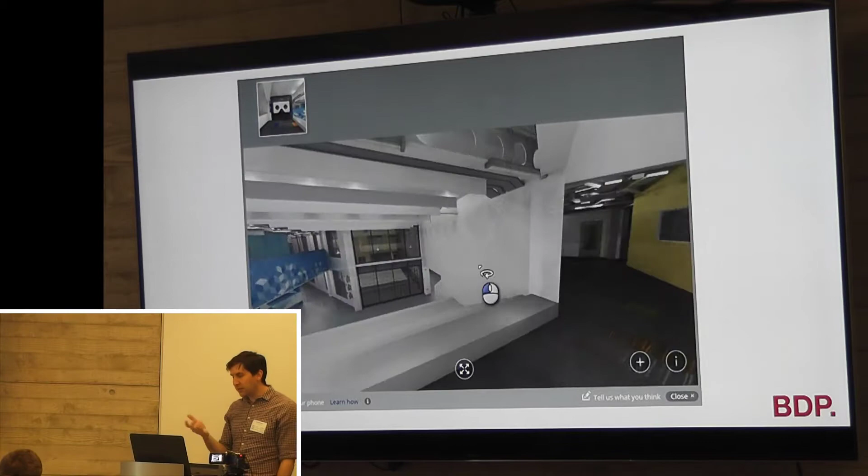So we'll start off with the cloud rendering. Possibly teaching grandma to suck eggs, but if you're in Revit and you want to create a stereo panorama - that's a 2-image panorama that allows you to have some sort of depth of field or depth perception - you just go to render in the cloud, pick stereo panorama, it sends it up to the cloud and renders it. So this is the sort of thing you get: an image you can pan around, and you need to get your materials right, you need to work on the model, otherwise you're just going to get something that doesn't look great.

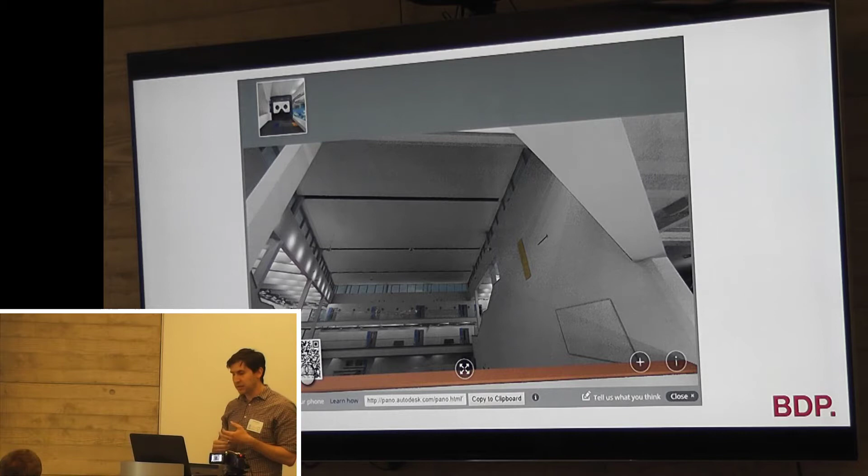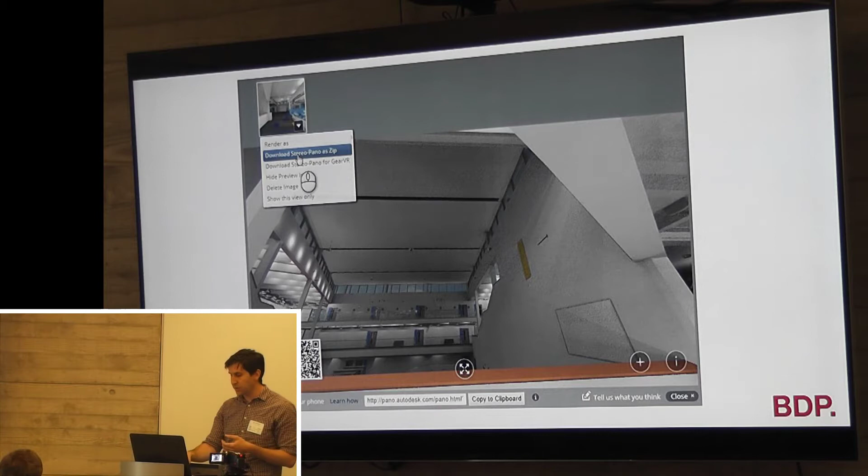But what we noticed with the cloud rendering is that it also showed this QR code, and we thought that's a cool tool. I'm sure everyone's used a QR code before and scanned it and it goes to that location. We thought that's brilliant, and you can also download this panorama essentially as a web page setup, so it's got all the files you need if you wanted to host it on your own web server.

I've been doing them for 10 years and I still don't know. But essentially it's kind of an unfolded elevations, 3Ds, and on our healthcare jobs it'll have a list of equipment that's in the room. This thing's evolved from being just 2D when we were working in microstation, to having these 3D images on the sheet. But actually what would be really cool is if we had a panorama you could scan and jump straight into, allowing users to look at this in more detail and really understand the space, because this quite often doesn't get across the sense of scale or the layout detail you want to portray.

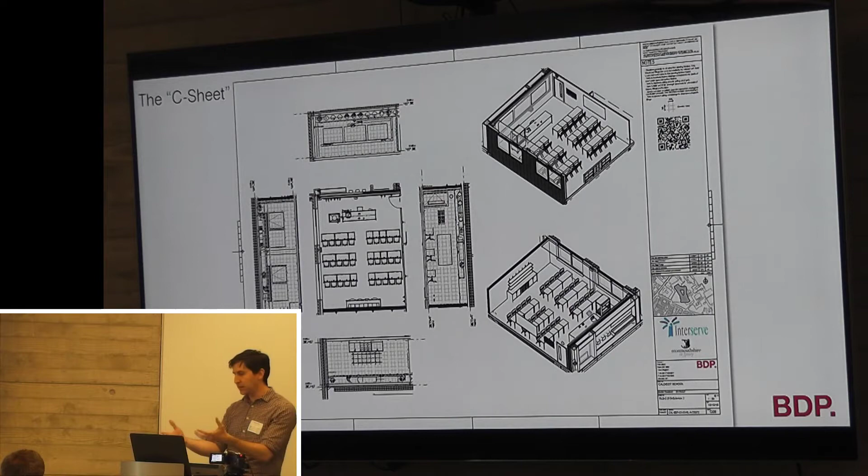So how are we going to do that? This is what we aim to do. Cheesy promo video. So the idea is that we issue, it could be hundreds of rooms, we issue the drawings before we have a meeting.

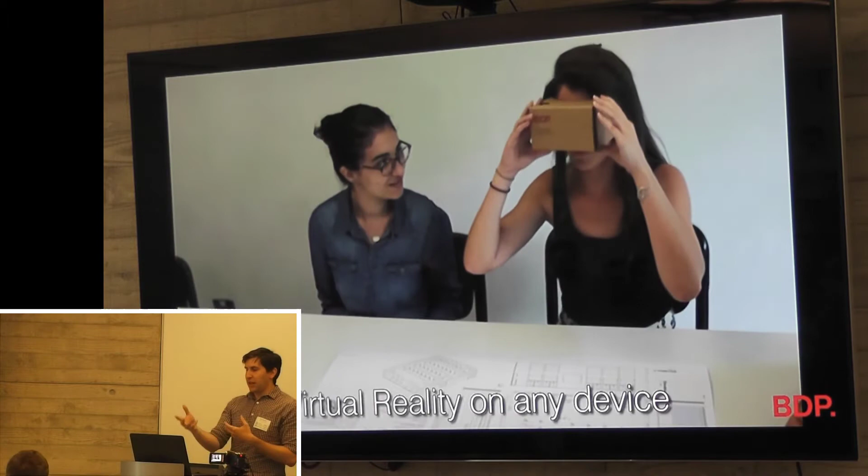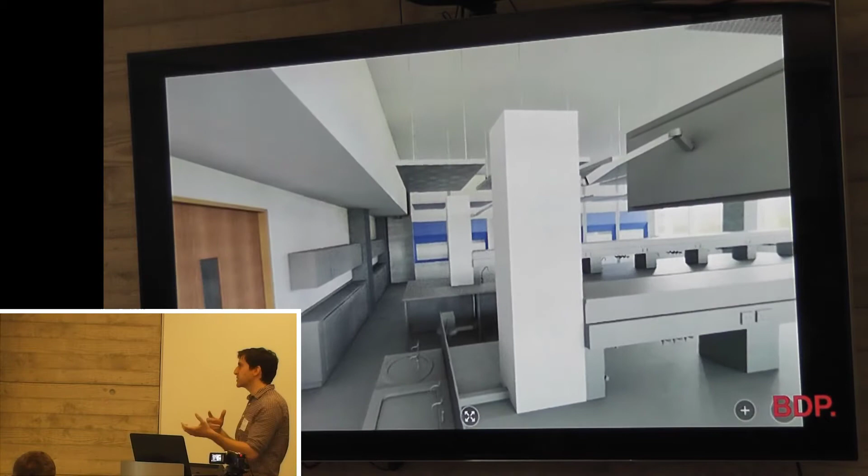We put the QR code on the C sheet, and hand out these free cardboard devices. They scan it with their phones, and it means our users have seen the space and the room well before we actually go to speak to them, so they've got ideas. Quite often before, it'd be the first time they've seen the space, and we'd end up having extra meetings because they hadn't thought of something crucial, so we'd come back and end up having many iterations of the same meeting.

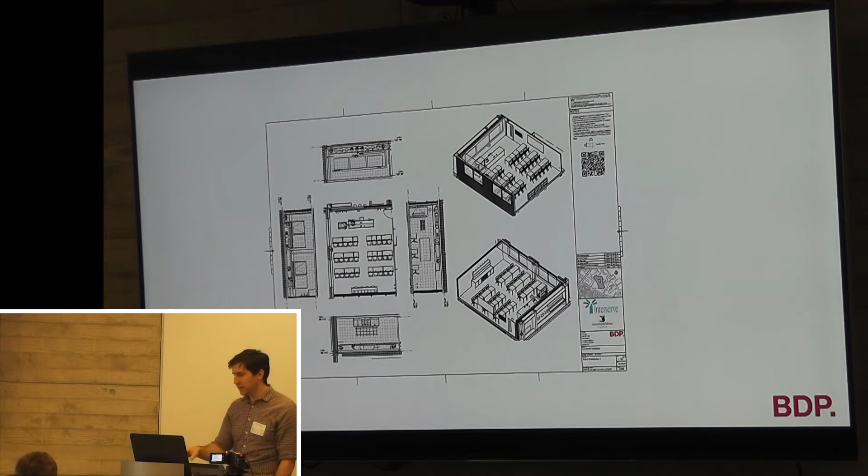So doing that once is fine. You could just go into the cloud renderer, snip that QR code, it'll be hosted on Autodesk cloud server. But there are two problems with that. One, imagine doing that for 400 rooms, it's not going to be particularly easy. Secondly, when you do a new render, that QR code is going to change and you'll have to update it, so that's no good. So how are we going to do it for loads and loads of them?

So the thing that answers all of my questions and my problems is Dynamo. We turned to Dynamo to automate as much of this as possible.

So there are a few steps to it. The first is that we automated the production of the view - we created a view at the centre of every room. The other thing this part of the script did is place a light object that was massively bright, so rooms that didn't yet have any artificial lights would still have a light source. It works because when you upload to the cloud render, it automatically adjusts the exposure, and we put the light at exactly the same point as the view point, so with Dynamo you don't get any funny shadows from that sort of thing.

So that's the first bit. The second bit, we use an external DLL that I was sent, which you can link to in Dynamo to create the QR codes for all the web pages we're going to upload this to. The advantage is we can have a static QR code, so if we update the image, we don't have to change what's on the sheet - someone just scans it again and gets the latest image.

Another script places the right QR code on the right sheet in the right place, because that's not going to be fun manually. It also takes that standard web page setup and distributes it into all these folders before being uploaded to our own web space.

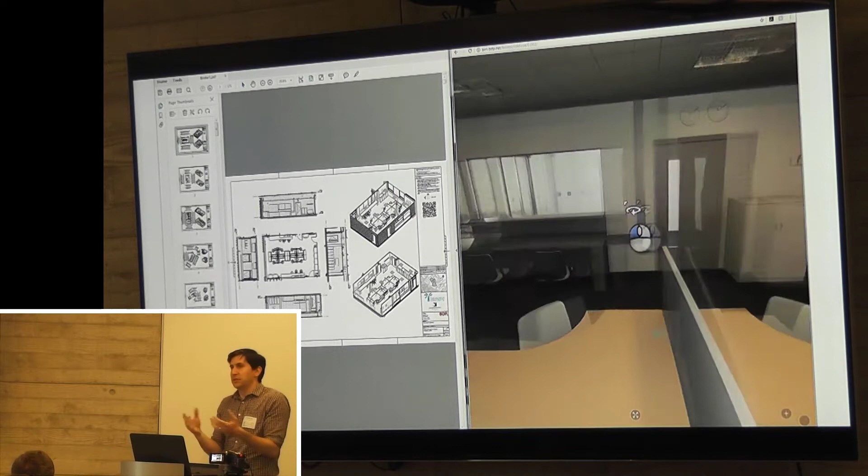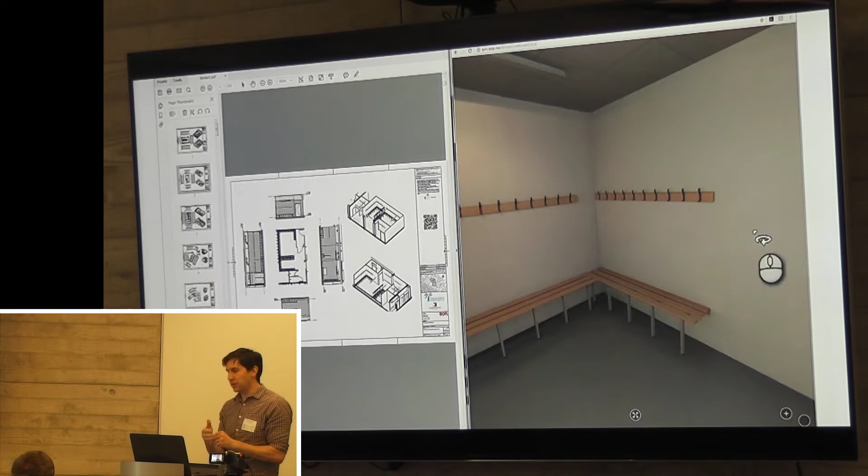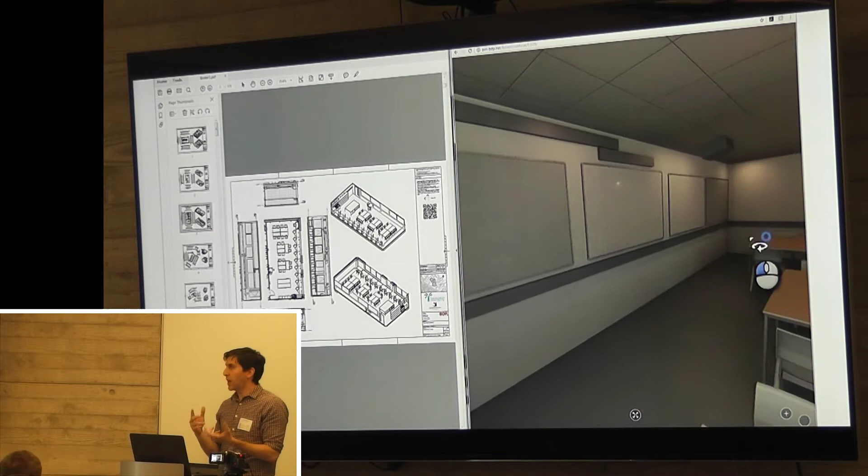So this is what it ended up being. Essentially you've got a C sheet, you scan it. They're not the most beautiful drawings because we're not embellishing them for any visual effect - we're literally just rendering what's in the model. So quite often they don't look great, but it allows people to see exactly where everything is, and to get a feel of the size of the space. They understand it a lot better than if they were just looking at the drawings, because we're used to looking at plans and elevations, and real people aren't.

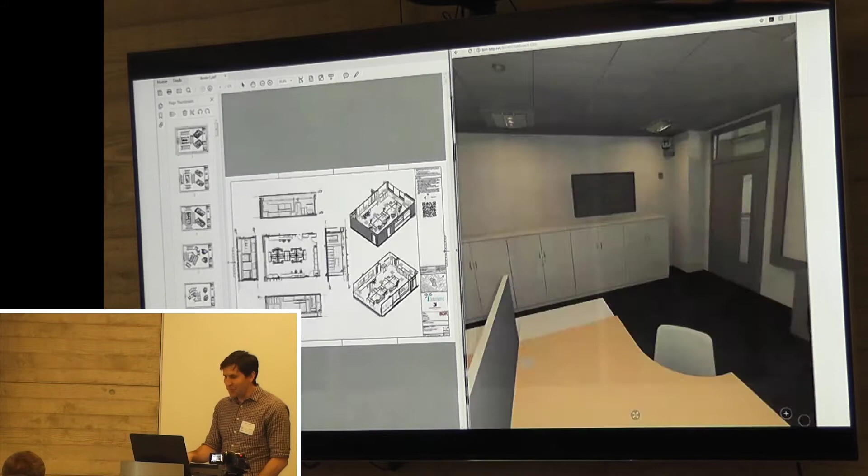Initially this was just for the user group with the client and the teachers, or the clinicians if it was a healthcare job. But actually, for a school, the kids love it. They know what their school's going to look like before they go into it, which is, I suppose, the same with any VR stuff. They got really involved with it and they loved it.

Another thing we didn't expect was that we'd pin these C sheets up on the windows inside the rooms on site, and the guys coming in to do fittings or anything would actually have a better understanding of why they were putting things where they were putting them. So it became something used throughout the process, and it became really useful.

I'll run through this quickly because it's just me being a Dynamo geek. I was driving home one day and thought, if you can use Dynamo to create loads of panoramas, why not use it to create 1,000 panoramas along a path and turn it into one of those 360-degree videos you can whiz around. I did a bit of research, and someone had asked the question, 'Can you do it?' The response was, 'No, you can't do it.' So I thought, let's have a go.

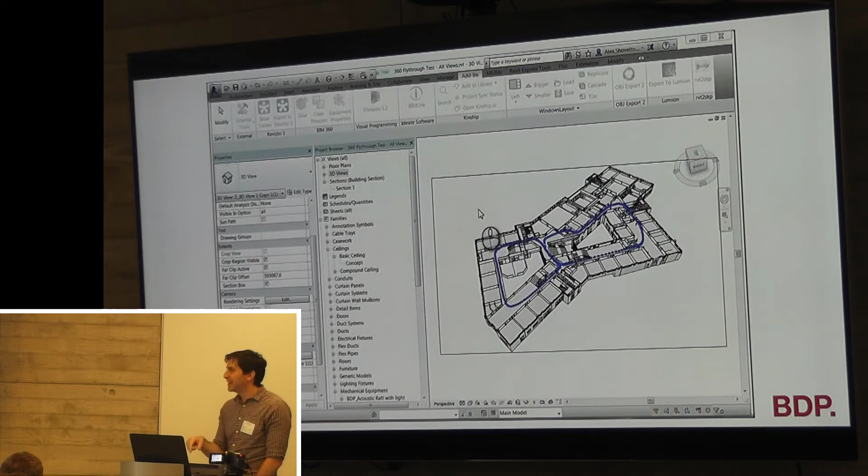It's pretty straightforward. Essentially a little script creates 1,000 views along this spline, and it created 1,000 views, which is kind of straightforward.

But this is where the problems start. You have the ability to download all, so if you want 1,000 panoramas it gives you that option. The problem is if you try to open a zip file bigger than a certain size, it just fails, saying 'Cannot open file' because apparently compressed folders bigger than 2 gig just don't work. So I ended up having to split it into batches of about 75 images.

This is great fun. So once I got that sorted, I was able to download all of them and open them.

The next problem is that a VR 360-degree video is made of what's called an equirectangular panorama. What you used to only get out of the cloud render - that's changed now - was a cubic panorama, essentially 6 images forming a cube, and I needed to turn it into an equirectangular one.

Fortunately you can automate stuff in Photoshop as well, and the route I took was via one of the other bits of software we'll look at today, KR Pano. It will convert from one to the other, so you can go from a cubic panorama to an equirectangular panorama, but only if you chop it up into its component parts. So that's great.

Once you've got all your front, back, left, right, up, down bits, you can turn them into your equirectangular panoramas, and then it looks like this, which looks a bit weird. Essentially this is 1,000 stereo panoramas, or single mono panoramas, just stitched together in Adobe Premiere Pro. That's not great, but you just add a bit of metadata and it then knows it's a 360-degree video.

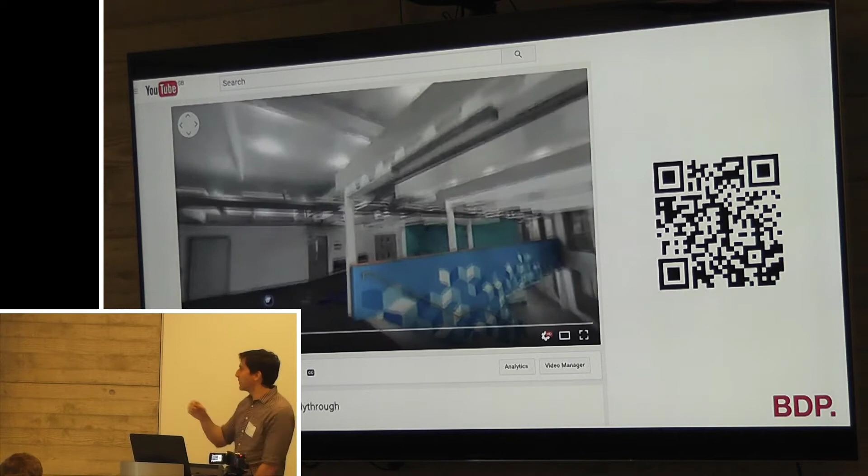If you want to have a look at it, get your phones out and scan that, and it'll take you to the YouTube page, where you can have a look around your 360-degree video - which is a nice gimmick, but it took forever, so don't try it.

This is a one-off. There are probably much easier ways of doing it, but I use Revit, so this is how I did it. Did everyone get that? They wanted to get it. Shall I go back?

Man with phone up. Okay, right. So, KR Pano.

This used to be a slightly long-winded way where you had to again cut it up into its constituent parts. Now they've updated the cloud renderer so you can download a number of different types of panorama - you get the cube strip, a strip as a cross, the equirectangular panorama, or something for Gear VR, which is useful.

Fortunately, KR Pano have updated so you can just drag the regular cube strip straight in. If you create any type of panorama, whether equirectangular or a strip from any of these - pretty much anything, this is just what we use - you can drag it into KR Pano and it will create a virtual tour viewable in a browser, which is really useful because it means you can look at it on any device, which is what we're about because it's cheap.

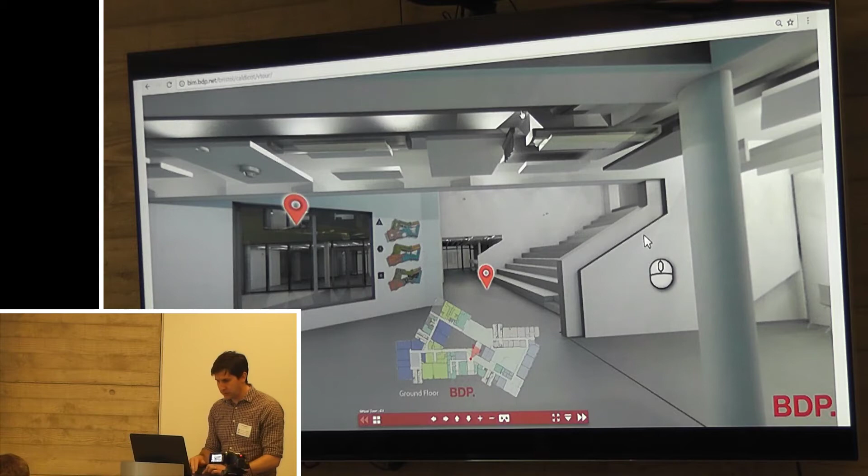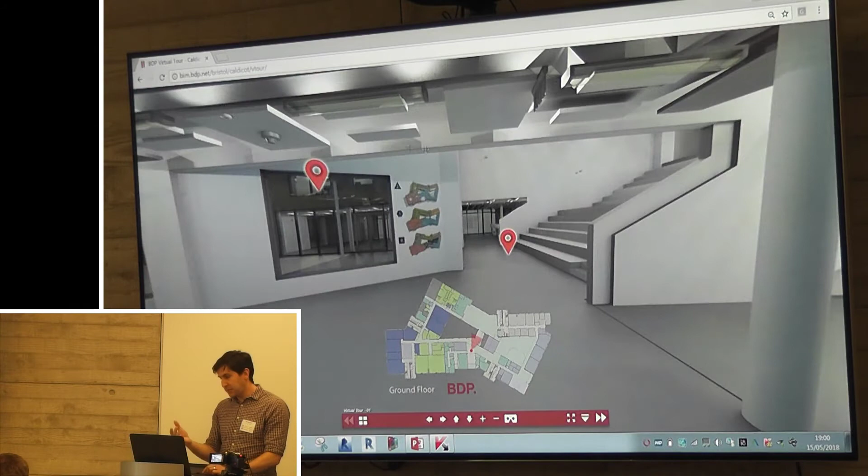Okay, so essentially it's the same sort of thing, this is the same school that was in the video. It's the same thing with the C sheets, but you can wander your way around the building, and this just gets hosted on your own web space.

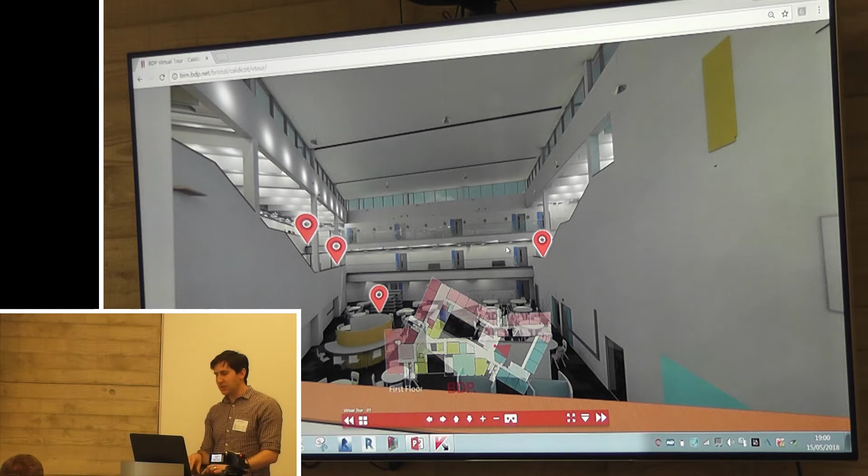It kind of, if you want to embellish a bit on it, you need a bit of web developing knowledge, a bit of scripting know-how. It wasn't too difficult, it took me ages to work it out, but we can now quite easily transfer that to other projects. This started off as a compass example that they had with something in the middle, and as you turned, it would turn it. But essentially, for each one of these, I don't tend to do this anymore, because you need to manually set the position and the starting rotation of that little pointer that shows you where you are on the map.

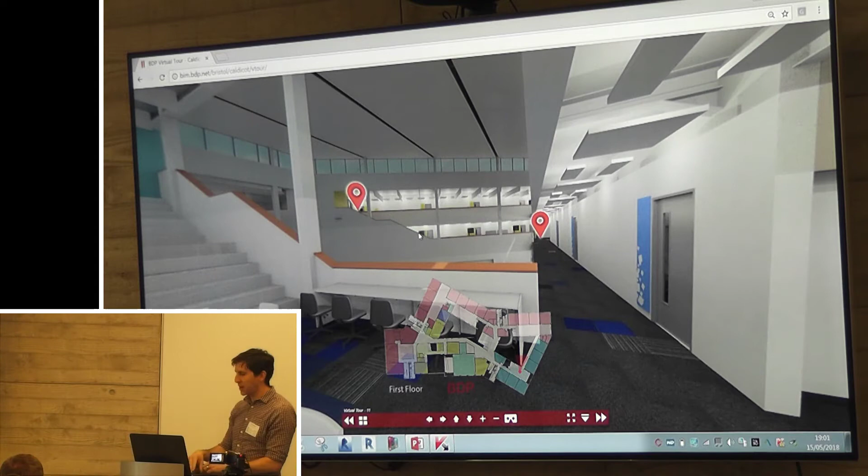But it's useful. Anyway, I'm now wondering how many of my videos are now working. Okay, so...

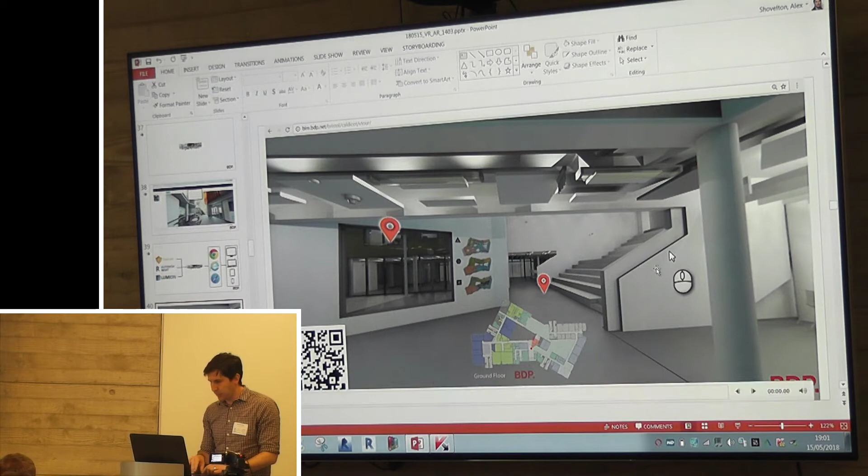How to do it is fairly straightforward. You drag and drop. This is the kind of weird thing about it, it's not the most intuitive interface. You take panoramas and you drag and drop them onto a .bat file. You then open up this other executable that you drag one of the files that's been created into it in order to edit this tour. So from that point, it's pretty straightforward.

You add a hotspot, which is a point you click on to go to another view. You say where you want that to go, you pick the image, hit save, and you can also set which direction you're looking at when you first open that view.

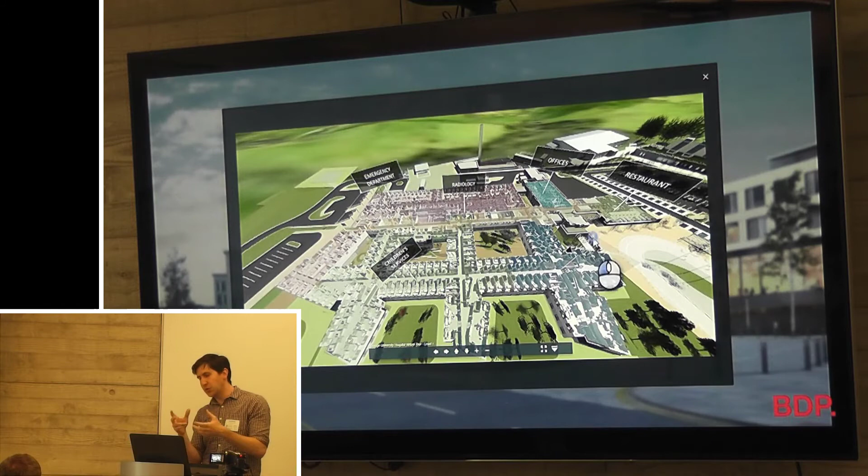So we like it, it works, and it's quite versatile because it's web-based. We've done stuff like this for a big hospital we're doing in South Wales. We've created a website for it so that the clinicians can have a good look around before it's built. So a different use of it, but again this is because it's basically a web technology. You can just embed it in other things, and it does what it says on the tin.

This is how much it costs. It's 129 euros, so that's pretty cheap. That's the version, currently that's what we've got. If you right-click it says it's krpano, and it's got a little bit of branding on it, but actually when you're looking around it, it's not there. You can pay more to remove the branding and make it a white label thing, but essentially it's very cheap.

So in terms of the good and the bad, the fact it's browser-based means that you can view it on anything. It's customizable, inexpensive. I've got self-hosting on both sides of this, because the fact that you can host it yourself is potentially good for security. If you've got any security concerns, you can stick it behind the firewall, or password protected stuff, it stays in Europe, that sort of thing. Some of these other platforms might have their hosting outside of the EU, which might be an issue for some projects.

In terms of the cons, the workflow's a bit odd. If you want to get the most out of it, you do need a little bit of web design knowledge and scripting nous. And again, the fact you need access to some sort of hosting in order to get it to work.

So the next one, Entiti. Essentially what this is, the way I've used it in the past, is a marker-based augmented reality system. So you point your phone or your tablet at something you've made, it could be a drawing of a plan, a site plan, it could be a C sheet, and a model can then appear out of the page. You could also make a video appear, you can turn it into a game, all sorts of things. But that's what it does.

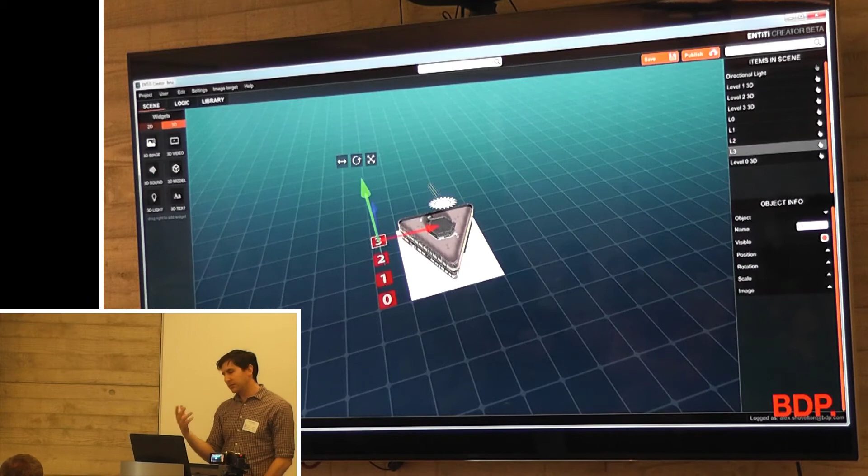The thing I really liked about it is that it's got this Dynamo type visual programming interface, so you can get it to do certain things. So I think these are switching things on and off based on when you touch the screen.

But you can do other things as well. You could link to external content and all that sort of stuff.

If you look on the App Store, there's two. The newer one is Entiti 3, which is coming out, and Entiti, which is the one I've got some examples of that we can have a look at in the break. That's using that, if anyone wants to download it.

So you just get your tablet or your iPhone out, you scan it. If it works, it will identify a project, so you don't actually need to know, you don't need to preload it on. It recognises the image, goes through its kind of database of stuff and recognises what project you've got. You're then prompted to download it, so the whole model's on your device, and then this happens.

So it allows you to set up this interactivity. The reason you've got columns coming through is some sort of weird glitch with the export from DAE, but this is how it works.

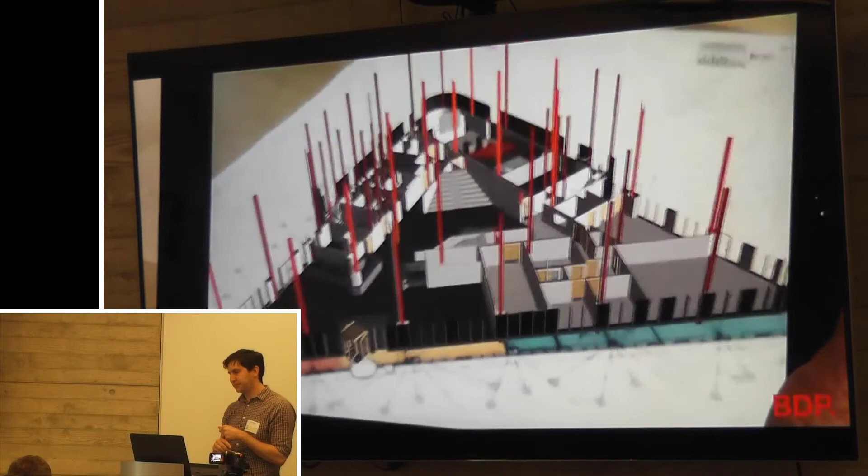And this is where the kind of price comes in. I've been testing it, and it was basically a free trial, you can just sort of see what you can do with it. Their pricing now is $55 a month, which actually doesn't seem too bad. But whether you're going to be able to do enough projects to get the most out of it kind of depends on how you go about your business, I suppose.

So pros and cons. The big thing is the interactivity, the fact that it's fairly straightforward. You don't have to be scripting stuff in order to create interactivity for augmented reality. I like the visual programming stuff that you can do. It will take multiple formats. It's marker based, which is both a good thing and a bad thing - I'll show you why it's a good thing a bit later on. And you can combine multiple files, which is different to Kubity, which I'll show you next.

You can adjust the materials once you've put the models in as well, so if you want to change how things look, once you've got the model into the editing environment, then you can do that. And you can have this white label thing that you can brand based on your company. It's no longer free to test, apart from a 10-day trial, which might not be enough to really figure out whether you want it or not.

And it's got this 50 meg individual file limit, so if you've got quite a big thing that you want to put in there, you need to work out how much is 50 meg when you're exporting these files. And £55 a month, is it expensive? I don't know. So the next one, Kubity.

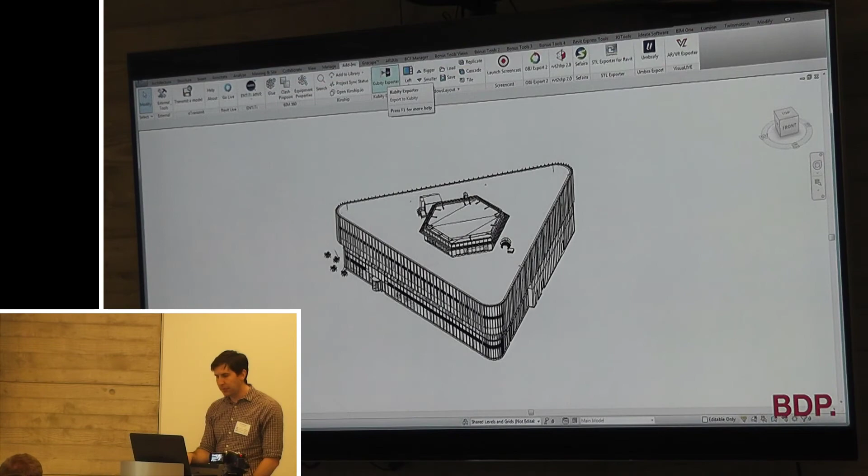So you can either use the Kubity exporter, or if that doesn't work, try Revit 2 SKP. These are again all available on the Autodesk App Store, if that's what it's called now. So with Kubity exporter, it opens up your model in software that's essentially free. I think you can have one model at a time for free.

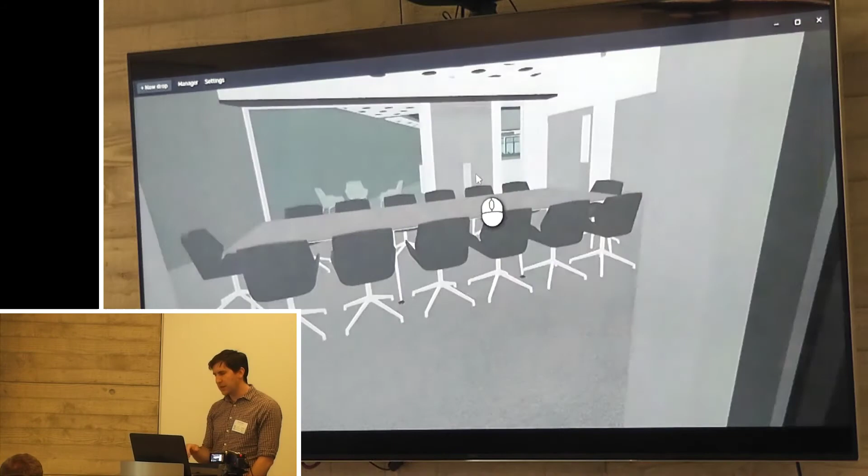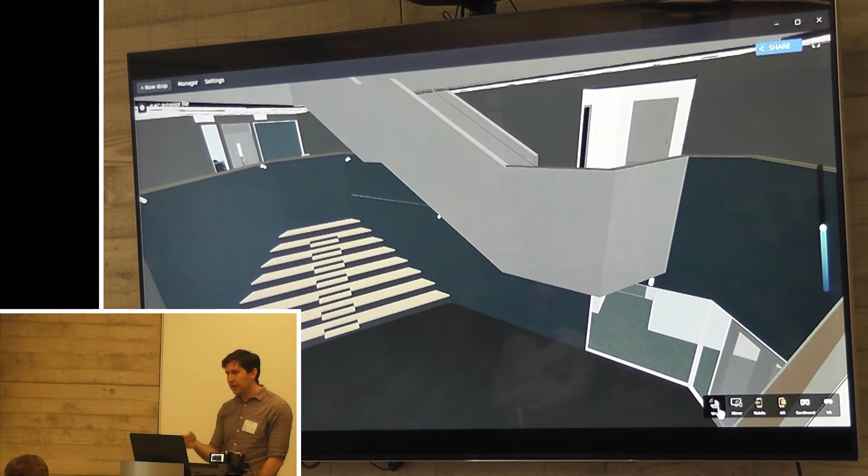So that's kind of how it looks. Doesn't look brilliant, it's just kind of a shaded view. It does bring some materials through, and what I've clicked on there is the web link. So essentially you can have the model, and the thing about this is it looks the same whatever platform you're looking at it on.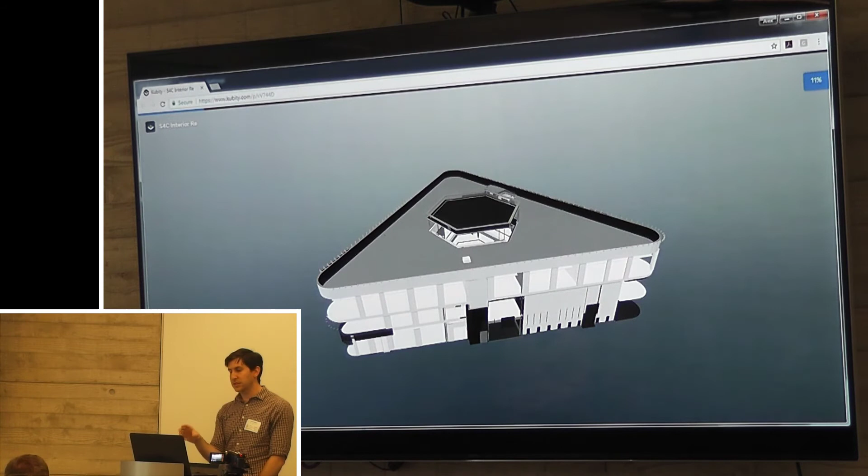So this is on the web. You can just send that link to someone and they can see the model, which is quite good. Has that just stopped, or is it? That's just loading, so that's fine.

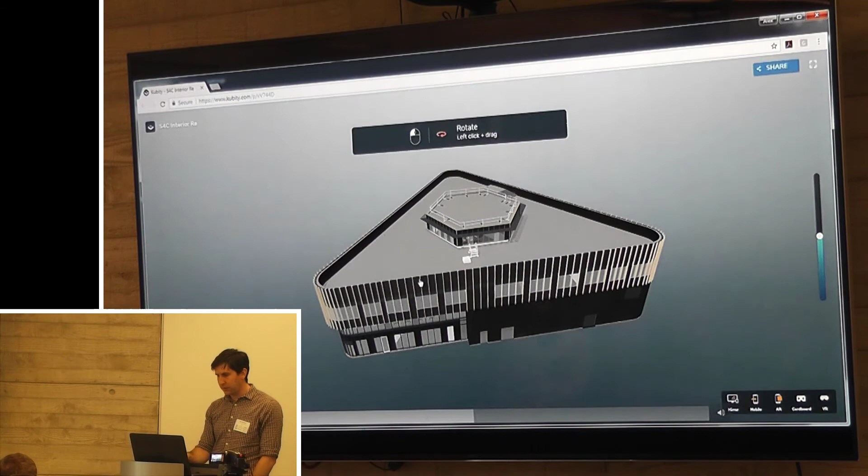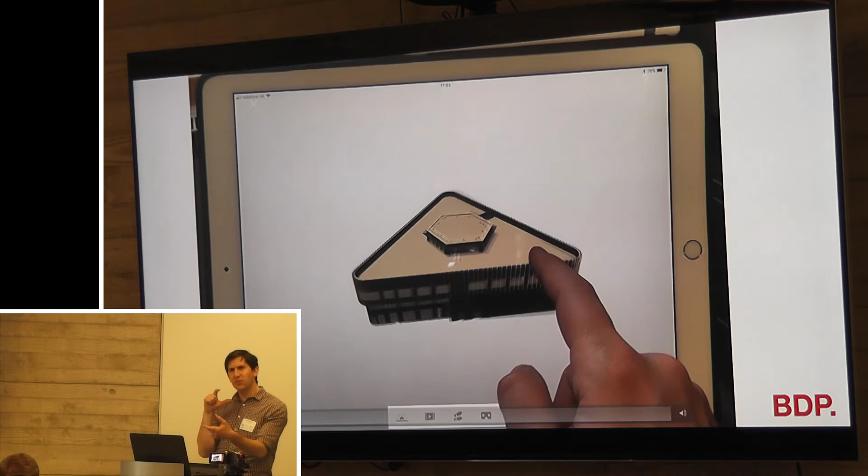And then you have a set of other links to platforms accessed via QR codes. The first one is basically a model viewer on a mobile device, which looks a bit like this. It's really difficult to film what you're trying to show on a tablet while holding a phone and looking at it, but it's pretty cool. As you can see, the materials come through in a funny way.

You've got some fairly enormous holes in your acoustic ceiling panels there, but what can you do? The next one is the cardboard viewer, so this is sort of what it looks like in cardboard. You get your two views, and what makes this quite good is that it puts the whole model inside the cardboard environment, so you can go to any point. You're not limited, as you are with KR Pano, where you've got to have rendered that view.

Or the 360-degree fly through, you have to be on that path. This enables you to get to whichever point you want, which is quite good.

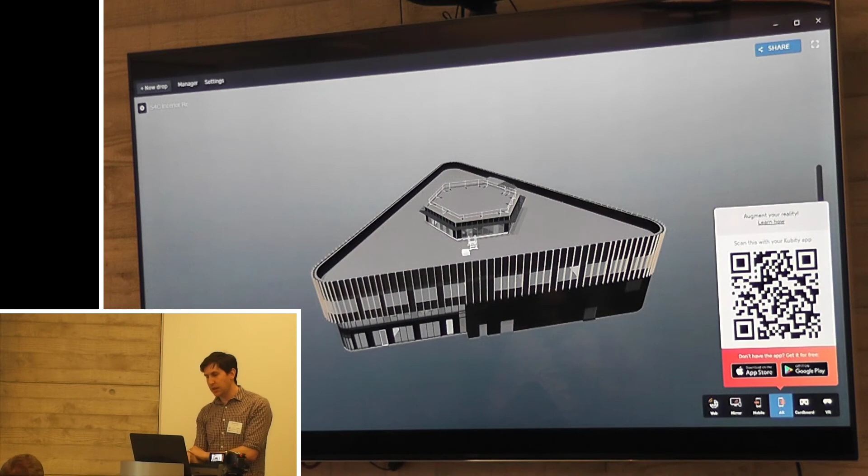And the other one's the AR. So this uses, I don't know whether it's got AR Kit, it's AR Kit, the iPhone one, that's what this is running on. Whether it's got AR Core, the Android one, I don't know. But this is how it looks. Looks pretty crisp. We can look at these in the break as well.

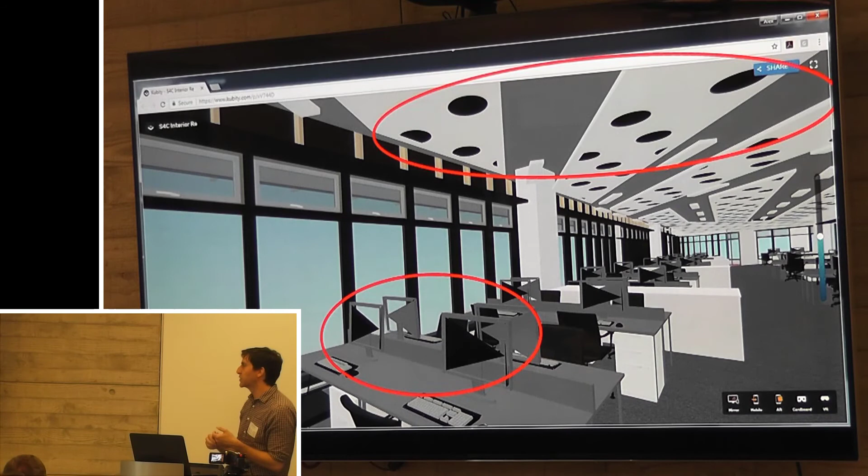Yeah, geometric fidelity not great. You've got holes in your monitors there, and again materials don't look perfect. The other issue, if you've got a big model, multi-disc thing, loads of stuff, you just get errors. It times out. It doesn't like anything that's too massive.

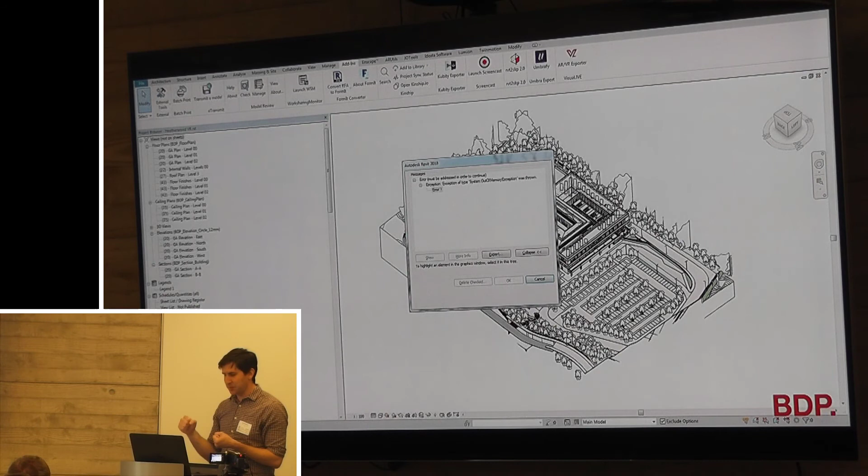So that's one downside. Kubity supports SketchUp up to 1 gig, but it won't tell you in its conversion that it's going to be bigger than a gig until the end.

It's pretty cheap, I actually got it for €50 because they had a sale, but 199 euros for a year is pretty good with all that stuff. Pros and cons: multiple platforms, VR, AR and a model viewer, direct export from Revit. The whole interface is really kind of straightforward and user friendly. It's not expensive. File size limitation isn't great, the geometric fidelity isn't perfect, you can't edit it once it's gone in, no interactivity other than obviously whizzing around it, and it's based on SketchUp.

So what have I missed? There are other things that will enable you to do this. Unity is probably the big one. Most examples that I've seen have used Unity. It's a proper game engine. I haven't managed to look at it in any depth yet.